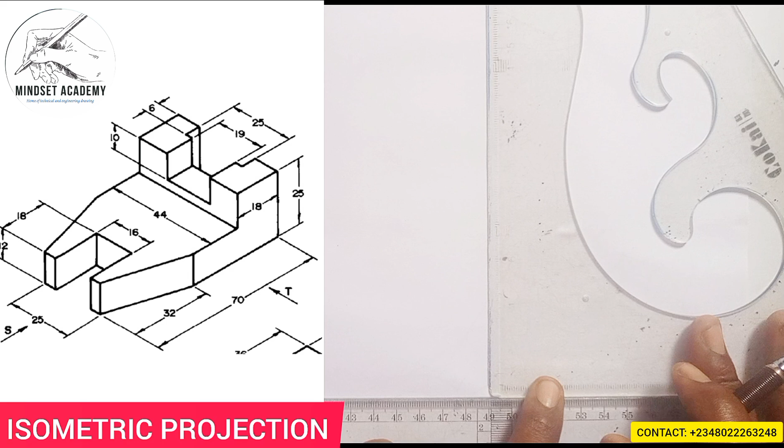Now, when you hear the word isometric, the first thing that should come to mind is to draw your isometric axis. That is, you draw the y-axis, and you also draw the x-axis, which are the two inclined axes, this way and also this way.

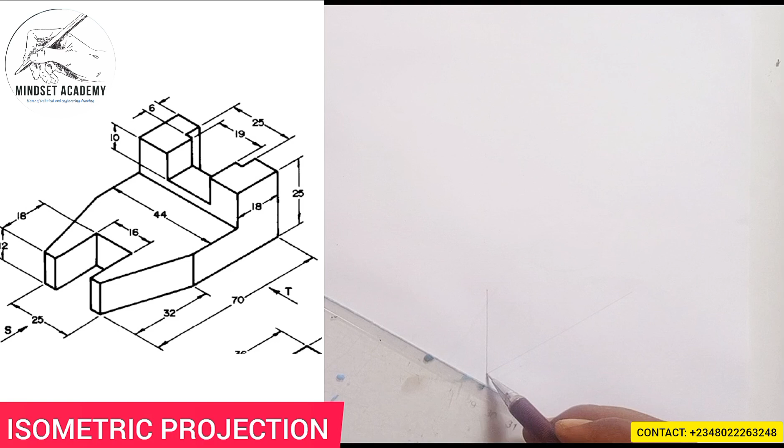I can decide to take it up so we'll have a clearer view of what I am talking about.

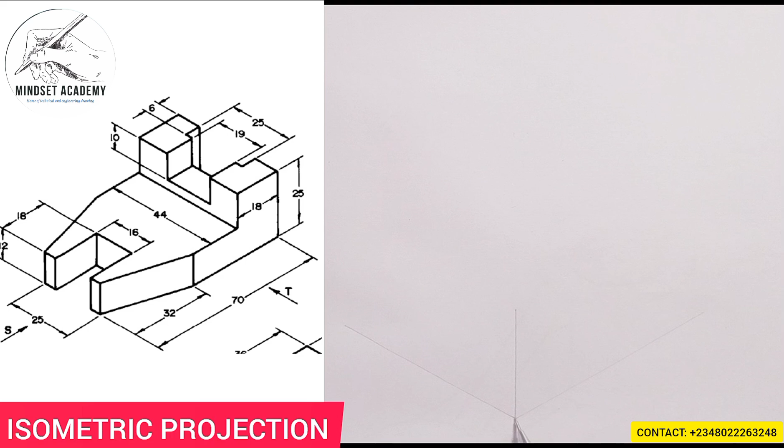Now, when you look at the figure, you discover that the entire height of this figure here is 25, that is the total height. So I'm going to measure 25. I'll take this to be my reference point, so if I take this way, this is 0, and here is 25, in between 2 and 3.

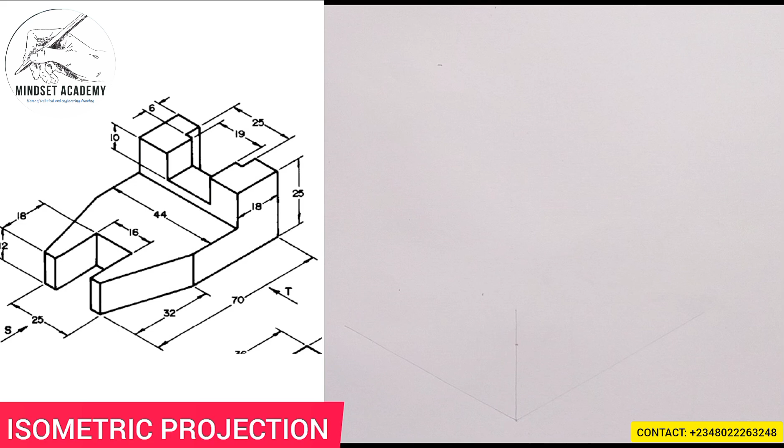Now the next thing I'll be doing is the entire length, and the entire length of this given figure is given to be 70, the total length. It's facing this way, so from here I'll measure 70, from 0 straight down to 7.

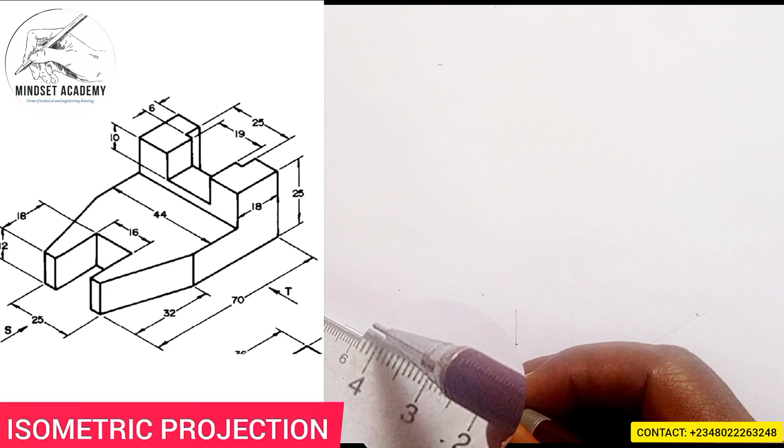Then the width is given to be 44, that is the total width. So I'm going to measure 44, from 0 to 44 here. Hope you can see that.

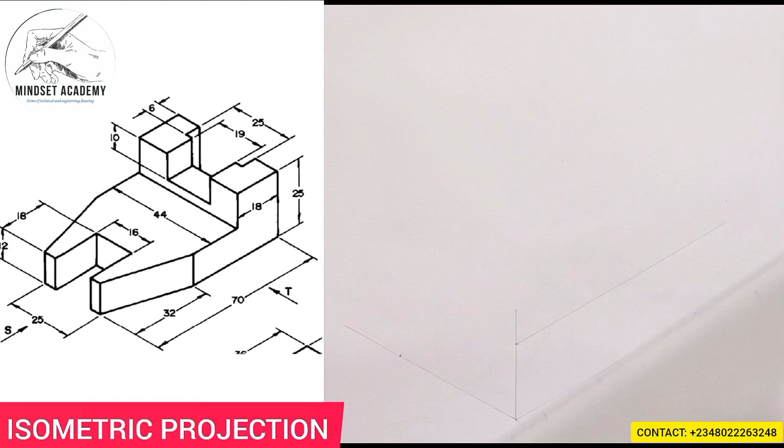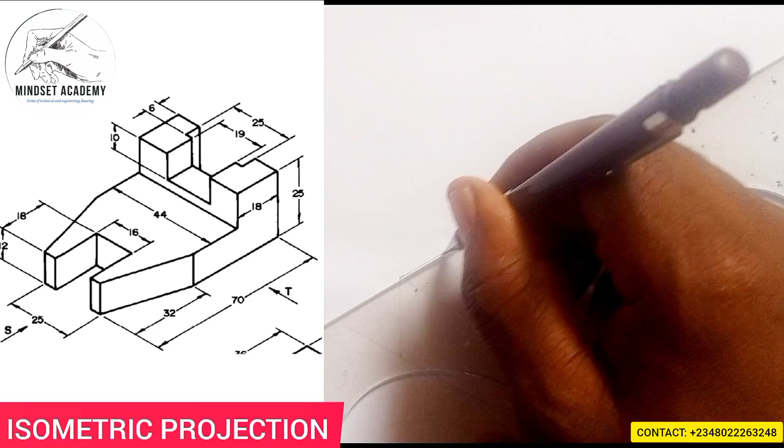Then I'm going to take all of them to form a box. So what I did at this point, I'll do it here too. I'll draw this, and I'm going to use this, I'll draw this. And I'll take this up to this way, and also take this up to this way. I'll close it up here, and I'll also close it up this way.

So this is what I am bringing out. I can decide to increase it so we have a clearer view of what we are about to draw. So let us move forward.

Now, since I have drawn out this figure, the next thing I'll have to do is start carving out the image. If you look at this side here to here, it is thickened, so I am going to thicken here to here, as you can see from the diagram.

Similarly, if you look from this point to this point, it is given to be 70 minus 32. So if you subtract 32 from 70, you're going to be having 38. So I am going to measure 38 from here, which I will thicken from 0, 30, 38 here. So if I should thicken it, this is what I will be having.

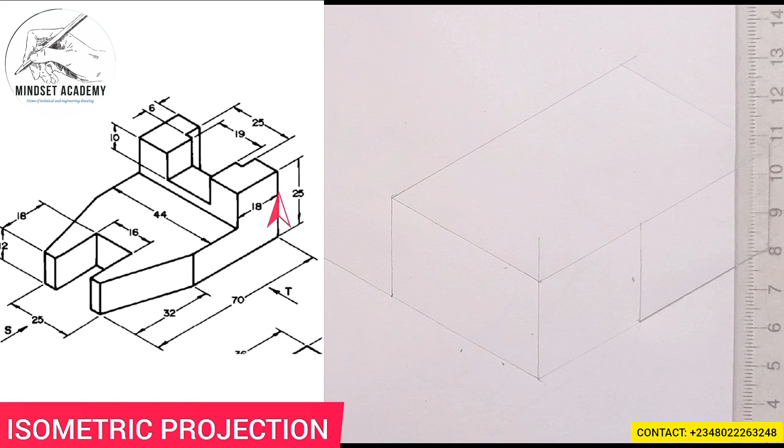Then the next thing we will be doing is I'm going to measure 18 from here to here, which is from here to here. I'll measure 18. So when I take this here, I have 0, and this is 18 here. Can you see that? And I'll be taking it one way or the other.

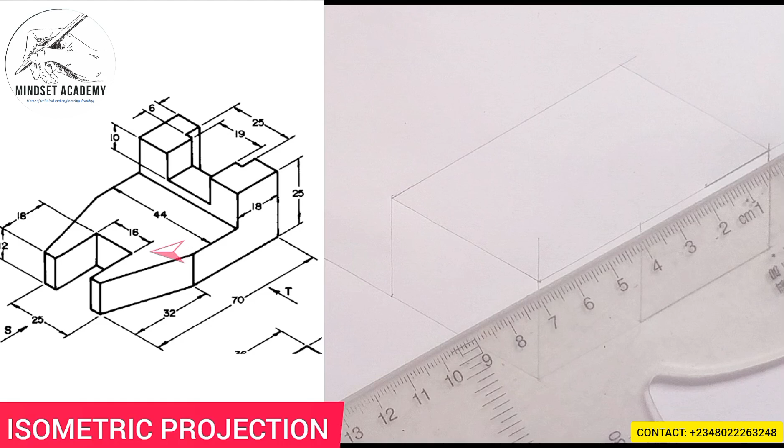Then what I'll do again is the height from here to here. They are saying from here to here, and that is 12. So this height here, I am going to measure 12, from 0 to this 10, 11, 12 here.

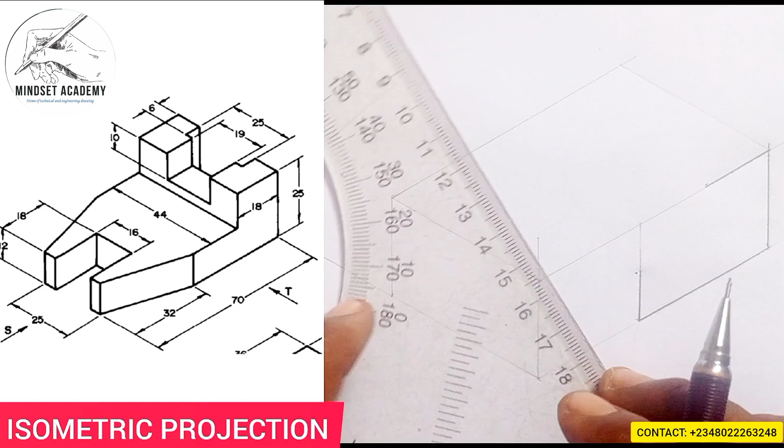Then I'm going to take it in this fashion. Can you see that? Then I will take it in, so this line and this line will meet. So when I do that, this is coming down and this is coming like this. So I can easily take it to this point, then I'll bring this one down to this point. Can you see that?

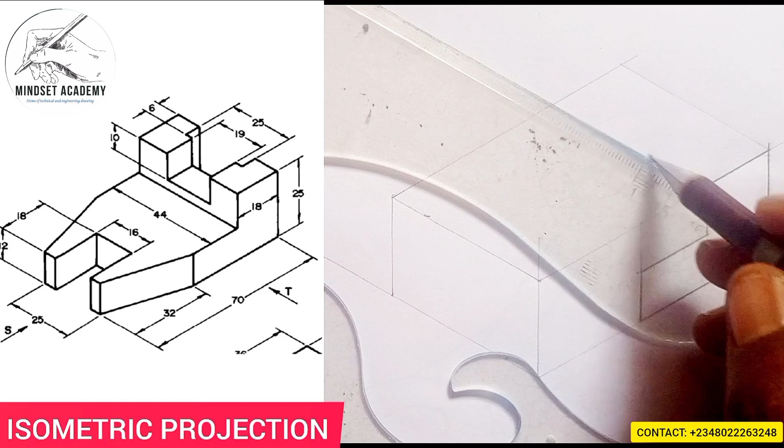And after that, I'm going to now get the center of this figure here, or we can be coming in gradually. So just take this to this point, and also take this to this point, and take this to this point, faint line. Then you can bring this down this way, and also take this way.

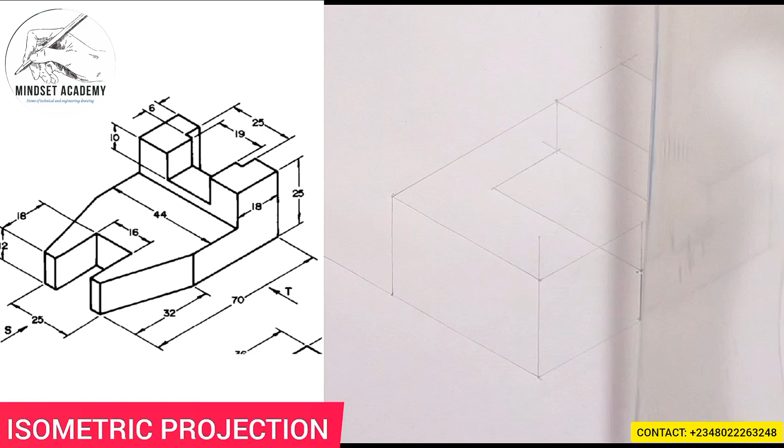Hope you can see what I am doing. I can also bring this down to a faint line, depending on what you want to do.

So look at what we brought out now. See what will happen. If I move forward, you discover that from here to here is thickened. I am going to thicken the distance from here straight down to here. It is thickened, you can see that.

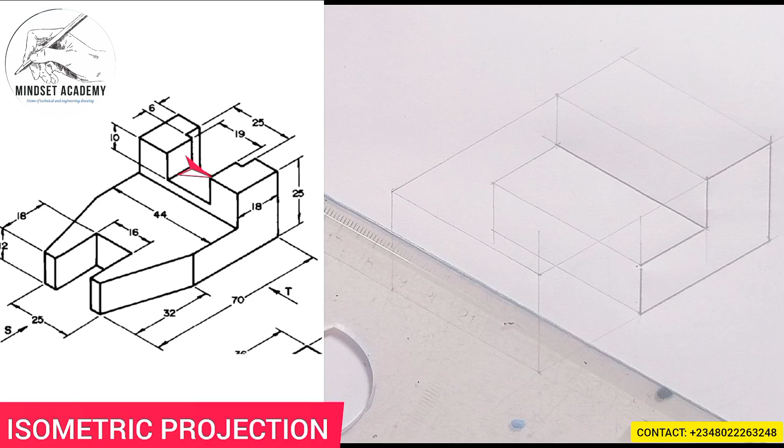Then from the top here, with the same thing I said, you measure 10 downward. So when I measure the 10 downward, from 0, here to 10 here - this is the 10 half here. To 10 here, I'll use my square.

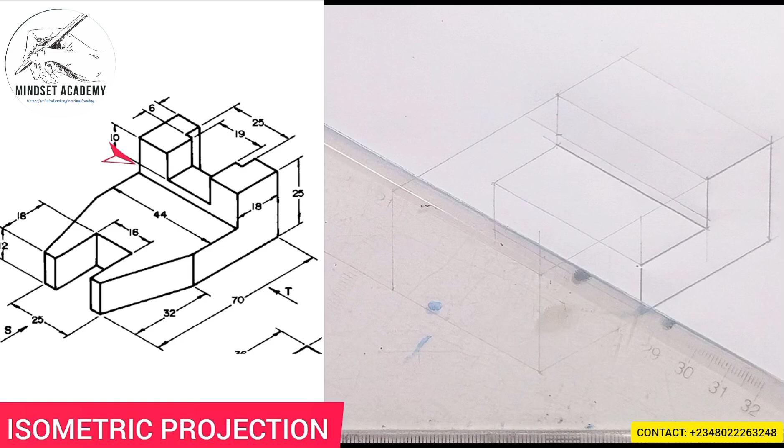Now take this in. Can you see that? So once you've done that, you will now measure. If you look at what is happening now, you try and get the center of that figure. So when you get the center of the figure, you see what will now happen.

So if I get the center of this figure here, it's easier. Instead of measuring those 22, just take the diagonals. Mark here, come from here also. Measure the diagonal, then you mark here. So where they meet is the center of that figure there.

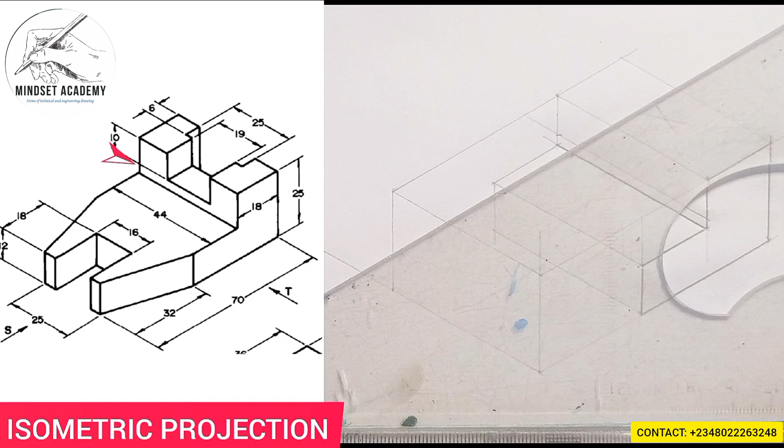So I'll take my meter rule, my set square. I'll just draw a line this way. That will tell me that's the center. This is what I'll just do. Hope you can see that.

Meaning that from here to here is 22, and from here to here is also 22. So if I should do that, the next thing I'll be having here, since I have the inner point here to be 25 from here to here, I'll take 12.5 to both sides, and that will give me 25. So from here, place my meter rule here from 0.

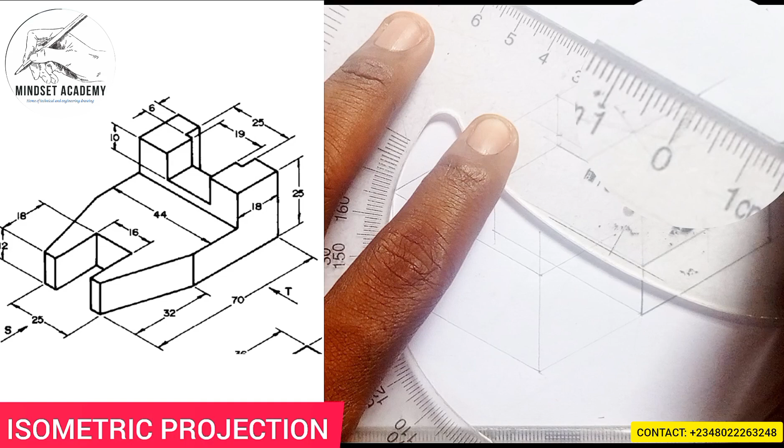Can you see the 0 here? I'll measure - this is 10, 11, 12, 12.5 is in between. I'll come here again - 10, 11, 12, 12.5 is in between. And I'll close here up. And I'll also close here up. Hope you can see that. And I'll also close here up too, this way.

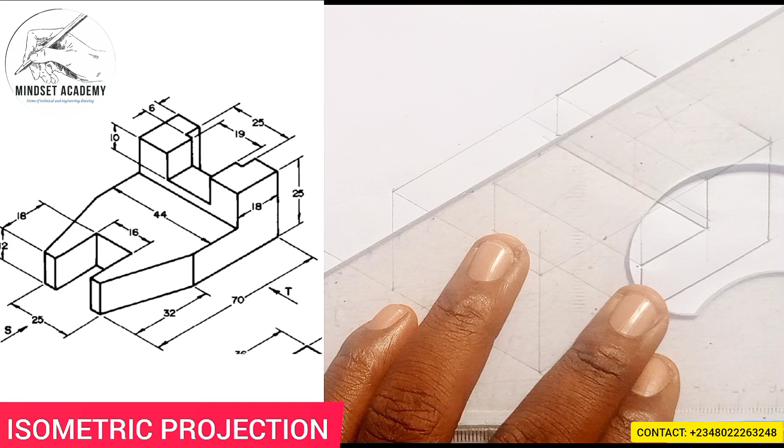Now once I've done that, see what will now happen. I'll take this in this fashion, and I'll take this into in this fashion.

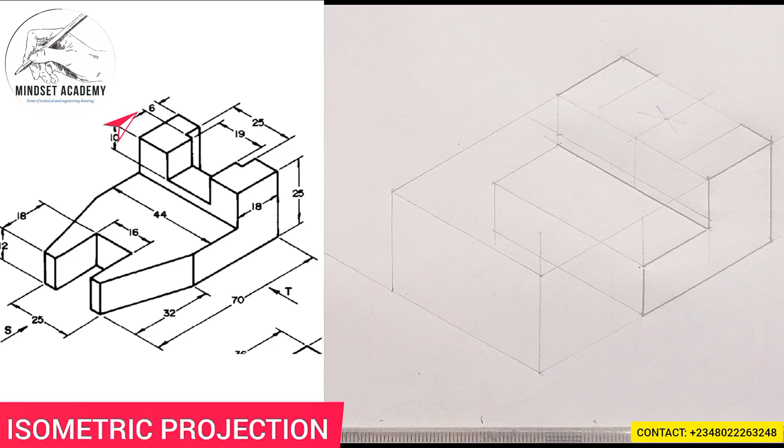Then the next one, you see that from here to here is 6, which is from here to here, 6, right? I was showing you on the screen. I'm going to measure that 6 from 0.

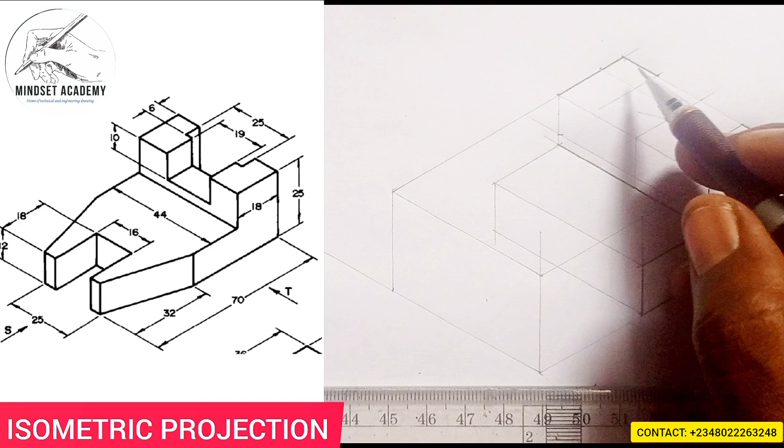I'm going to measure 6. Then I'll take my instrument, placing it this way, and I'm going to take the 6, just draw a line this way. See what I have done? So once I have drawn that line that way, see what is happening. I've measured the 6 down, right?

So from this line here, the same center line, we'll know the thickness from here to here is 19. That means divide 19 by 2, I'll be having 9.5, 9.5, right? So that'll give us 19.

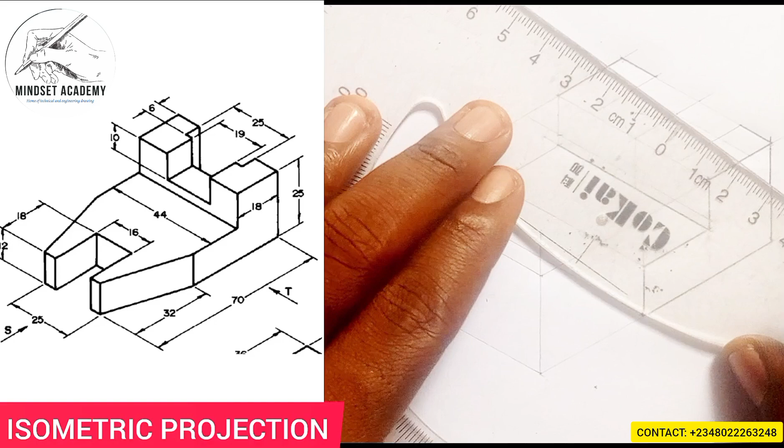So from that center point there, from that line I drew, I'm going to measure - this is 9.5, somewhere around there, almost 10. Here also 9.5, somewhere around here. So I'll just take this in, and I'll take this in. Hope you can see that.

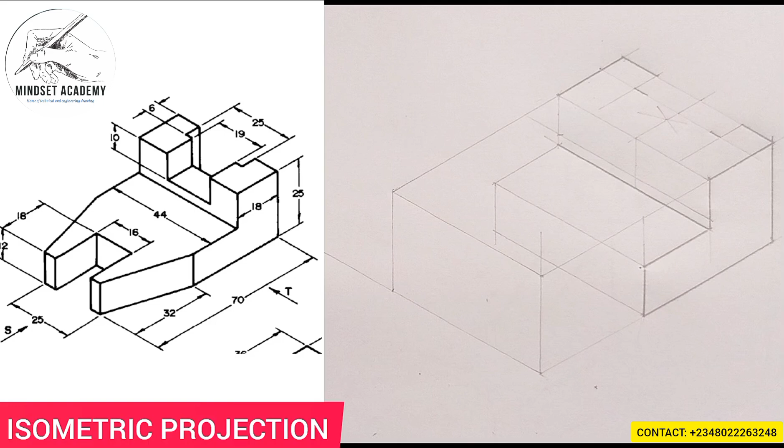That is what is showing on your drawing, at the right hand side of the screen, left hand side of the screen. So when I take this, I'm going to close it up, and I'll also close it up.

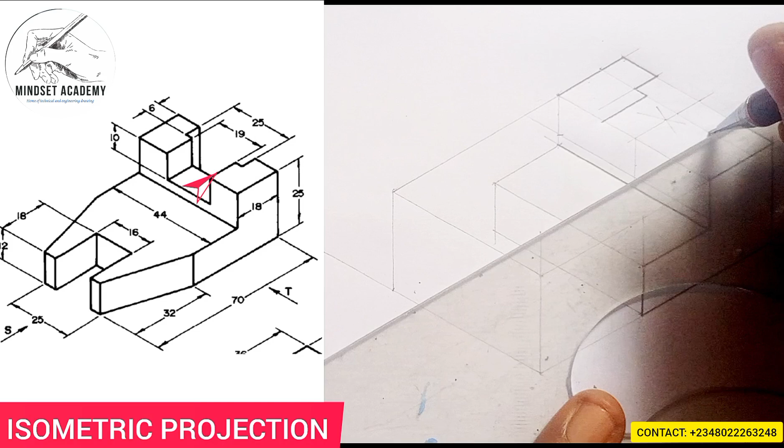You can see that. The next thing I will be doing is I will now take it to the back, straight ahead, like this, to touch here. And I'll take this to the back, straight ahead, like this, to touch here, as you can see from the screen. Then I'll bring it down to touch that length of 6 I measured earlier, this other line here. So when I bring it down this way, it's coming straight down to touch here, and this too is coming straight down to touch here.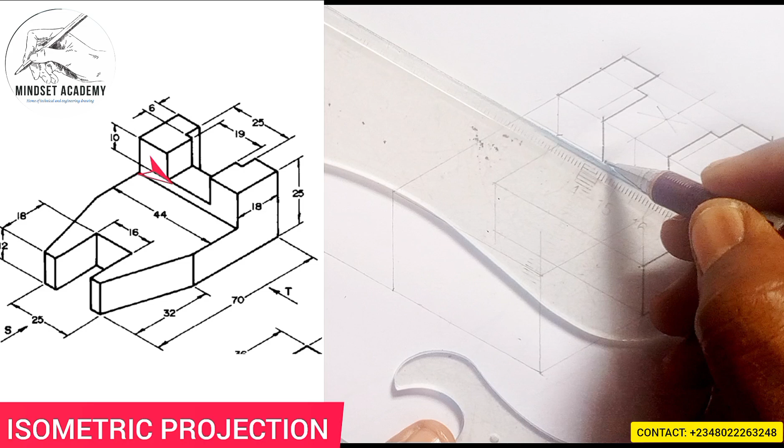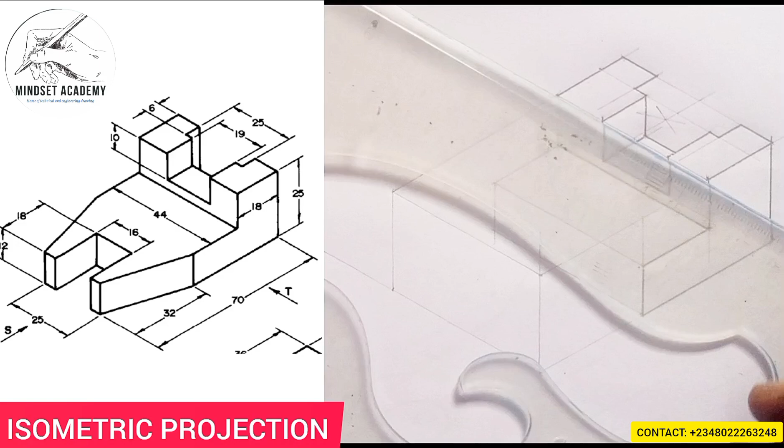I am going to close it up here this way. You can see that. I'll take this in this way, so that this can join this. Then this will join this. Then this will be coming in here. And this will be going straight down, right?

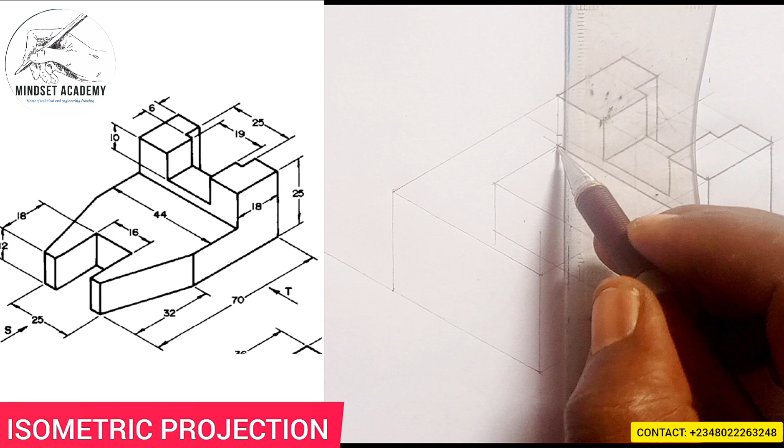So going in straight down here, from here. Can you see that? And this here will be closed. Then here too will be closed. And here will be coming down. Then here we're moving straight ahead to touch here.

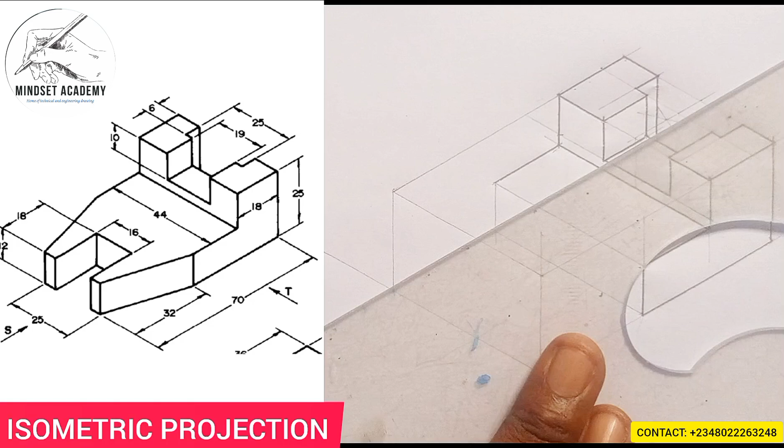So when you look at the diagram very well, you discover that we have a length of 25 here. So I'll come at the beginning here, I'll also get the center of it. I don't have to stress myself, since I've already marked the center here. I'll just still generate that same point straight down to touch here, then I'll bring it down here.

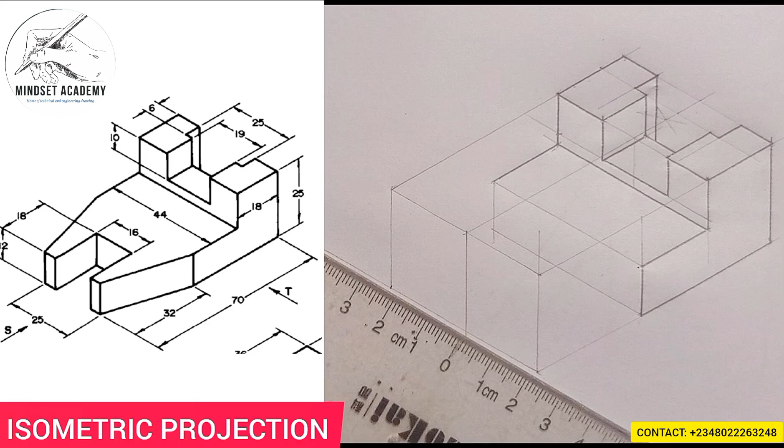So from that center here, from the front here, we're told that from this end to this end is 25, so I need 12.5 on both sides. I'm going to measure 12.5 from here, from this point, from 0. I'll measure: 0, 10, 11, 12.5, then 0, 10, 11, 12.5 again from the same point. This is where we are, so this is where we're stopping here.

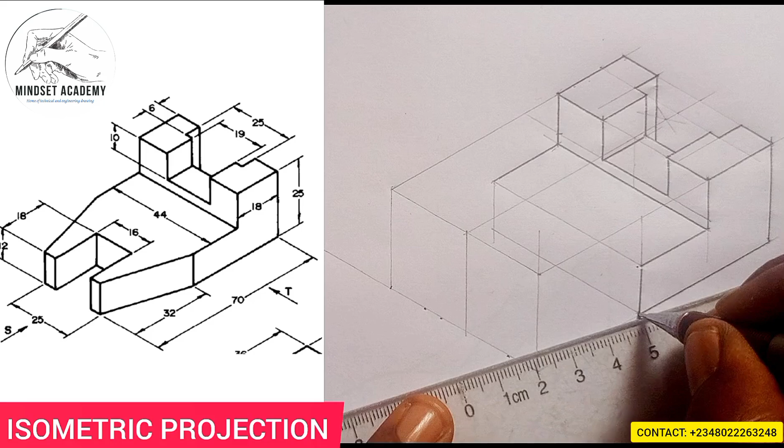Can you see that? So what I have here, I'm now drawing my line from this point to come and touch this 12.5 here. I'll draw my line, I'll take it upward this way, and I'll take it upward too this way. So the same distance from here is the same distance from here to here, and also from here to here.

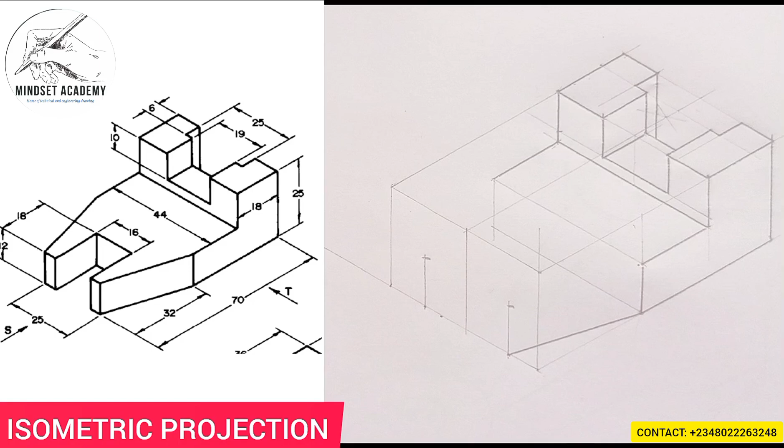So I'll take my meter rule and connect it from this point straight down here. I'll connect it from here straight down here, and bring it down, and bring it down. Hope you can see that.

We're not ending there, we'll continue. After you've done that, we still have a thickness also. From here to here is 16, that will give me the thickness there. So what I'll simply do is from this point here, I'll measure 8 on both sides. This is 0, this is 8 here, and this is another 8 here. So I'll close it up, and I'll close it up. That is the 8 we have.

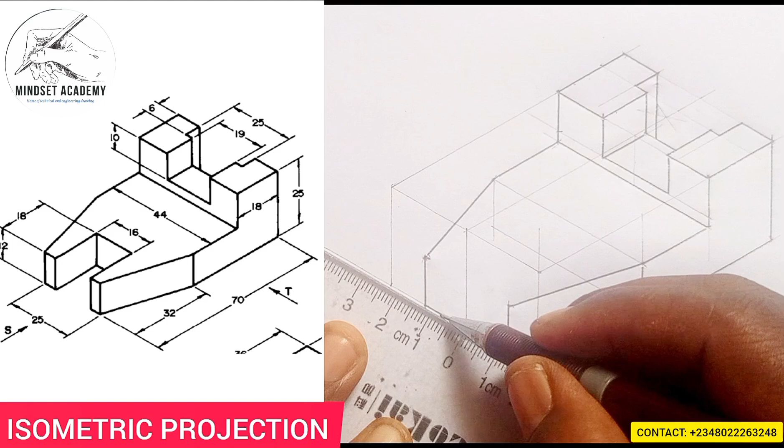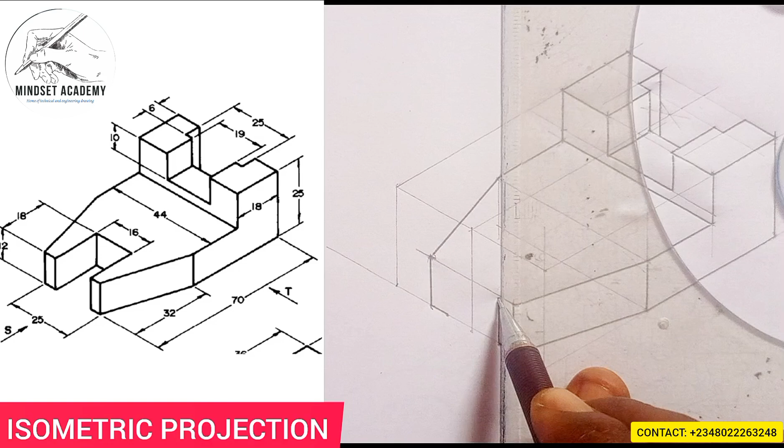Then I can simply draw a line from here, this way, and take this upward. So this will be going up, and this will be going up. And I'll close it here. If I'm closing it, I'm going to close it at that point here too. And I'll take it in this way, take it in this way, also take it in too.

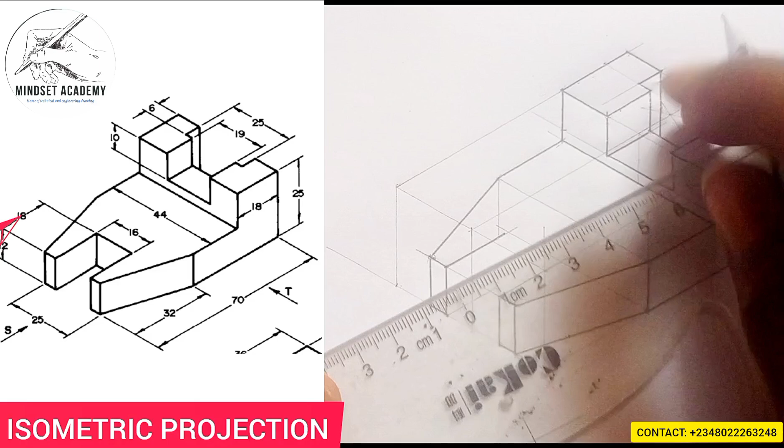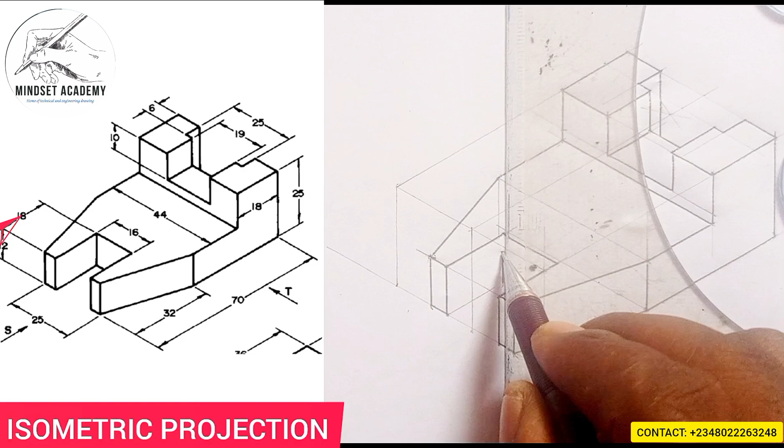So the length here, as you can see, is given to be 18. So I'll measure my length here to be 18, from 0 this is 18 here. And I can just stick it in once and for all, which I'm going to take this to this point also, and take this to this point too also. Then I'll bring here down too also. Then I can take this way also, then I'll close it down also. Can you see that?

So from here, this is what we simply have. We have drawn out the figure that is displayed at the left hand side of the screen using isometric projection.